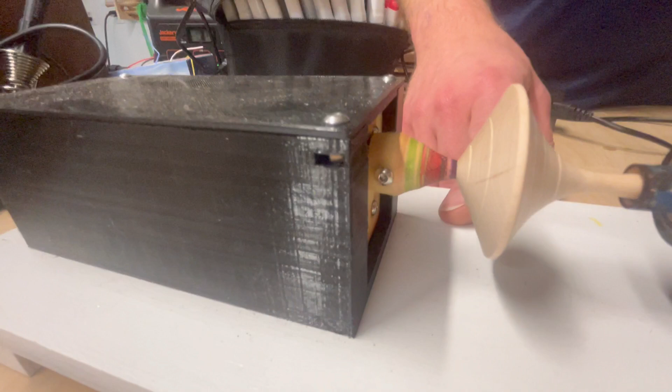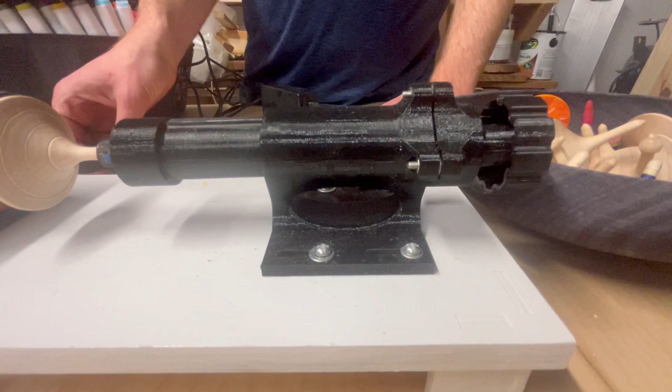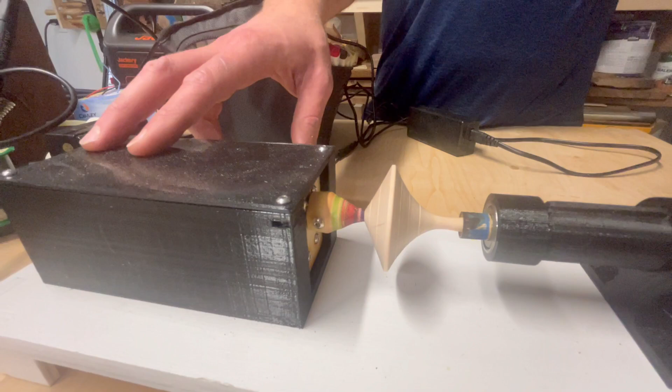So what's inside, we got a motor and what else in here? There's some electronics, a PWM motor controller, and a 1000 RPM DC motor. So that's the headstock and this is the tailstock, right? Yep. And you got a bunch of components, how many parts in all these things? There's 11 3D printed parts and 2 turned parts, then the board that controls the electronics, the motor, a couple pieces of power equipment, and of course the base here and some screws.

Okay, so go ahead, let's see it work.

I forget, is it speed adjustable? Yep, it is adjustable. Okay, cool. So that's how we're gonna have kids color the tops.

Like Bill said, we're not really crazy about the idea of turning the lathes on and having the kids color on the top. So when we do our demonstrations at the different shows we do, one's gonna be this weekend at the Environmental Center, we're gonna have the children color their own tops here. So what's the next step of the process, Bill?

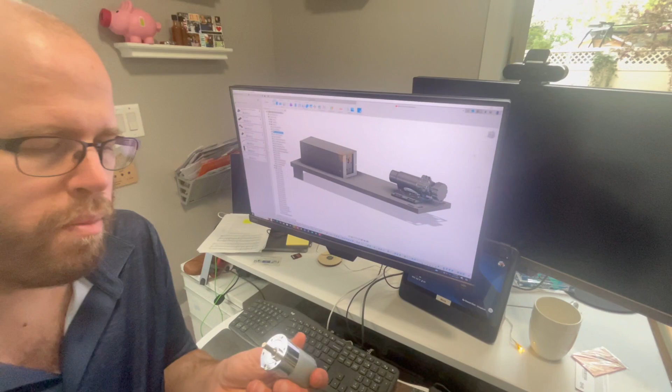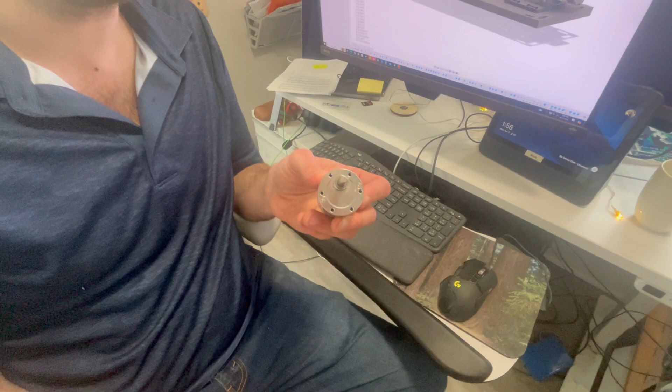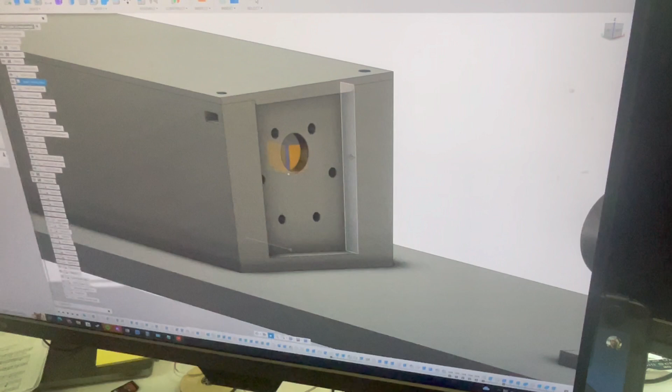Well, let's go take a look at the design. I designed this in Fusion 360, and I started with the motor. I designed the whole headstock end around the motor because I knew I couldn't build a motor, but I could buy one, so I bought a motor off of Amazon. I looked for 1000 RPM because I figured the torque on it would be pretty low and the experience of a high speed would be pretty good for the kids. So I started with this little faceplate that holds onto the motor at the headstock end, and then I just kept going from there. I knew I needed a plate to mount it, and I knew I needed everything to be coaxial so that the tailstock lines up nicely with the center of the motor spindle, and that was kind of the foundation of all of it.

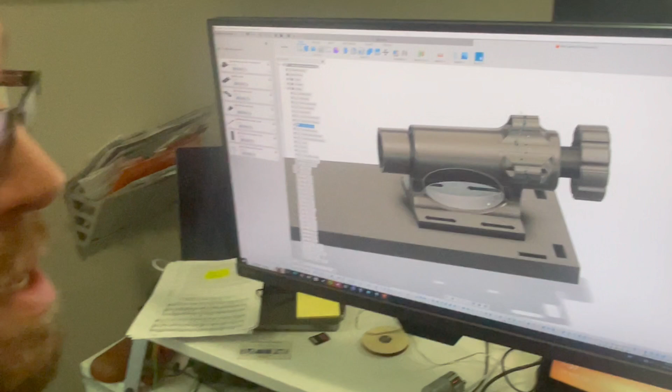Inside, you can see my mock of the motor, and then a place to mount all the electronics, a place to have the knob come out, and all the other bits of this thing. And then the tailstock, I used to have a Jet lathe, and having assembled and reassembled the tailstock before, I used that as the mental model for how to design it.

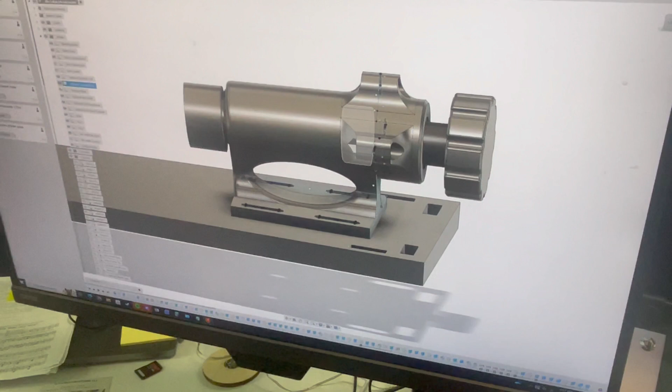This went through a couple of versions, it turns out to be a little complicated to make a tailstock, more complicated than I expected when I first started. But after about 3 or 4 versions of it, it turned out pretty good. The knob at the end, that's a pretty simple thing, but once you get inside, there's a couple more pieces to hold a 3/8 hex bolt.

Inside of a Jet lathe tailstock, there's a fairly large bolt that the quill comes in and out on. I couldn't find that anywhere, so I figured why not just use something I can get off the shelf. Inside, it's all designed around a 3/8 hex bolt.

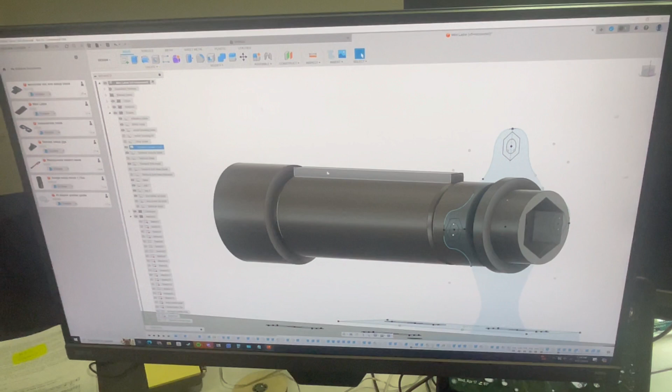The front end of it, the quill, is designed to retain itself. With the Jet tailstock, you have basically a screw that keeps it in place, but this top bar along the quill here keeps it from rotating inside. And at the front of it, it's designed to hold a bearing. It's not a perfect design, but it works pretty well for our purposes.

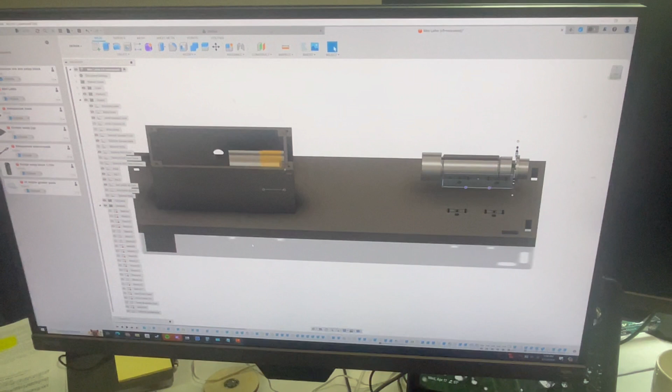And then of course the base I designed to be laser cut. It's just two pieces of laminated quarter-inch plywood. And that's about it. This took about a week and a half, start to finish. Total design time, about 60 hours. Something like that.

And you got the motor housing, right? Yep, so that's one, two, three pieces. Okay, so once the design's done, how do you get it onto the 3D printer?

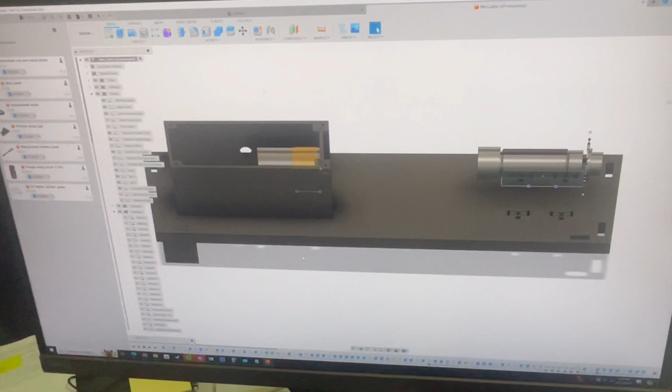So the 3D printing happens using a slicer. We export each of these models as STL files, and then I can import it into this program called Cura, and slice it, so I can put that onto the build plate.

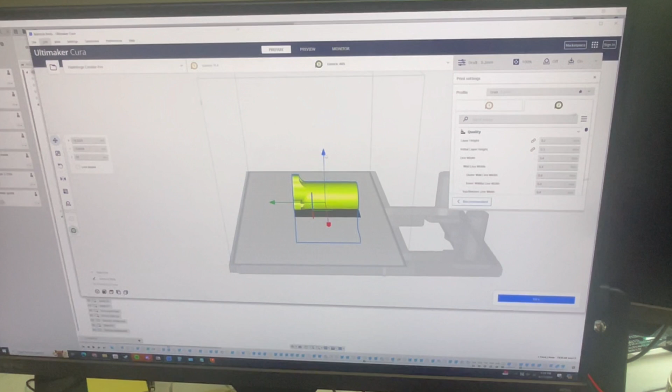I'm sorry, what do you mean by slice it? So 3D printers operate in layers, they lay down plastic in layers. Slicing it refers to cutting it up into these individual layers that are going to be printed. So one by one, the printer will lay down each of the 3D printed layers, and you can step through the process.

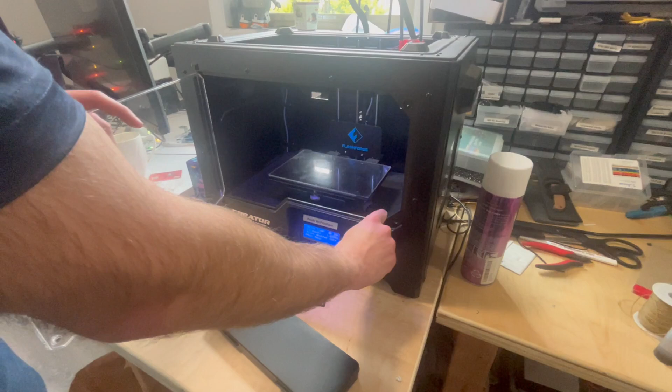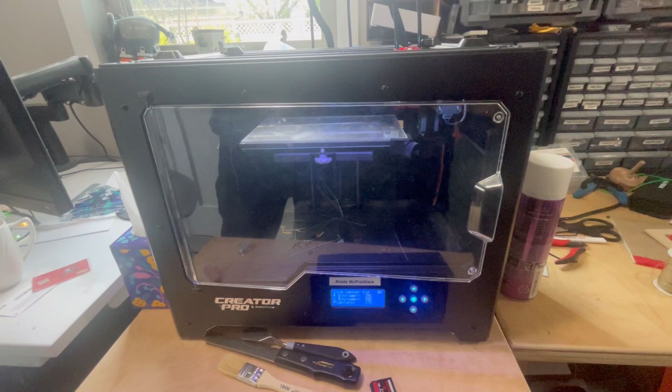Wow, okay. So once this is sliced in Cura, I can export it onto a chip here, and then I take that over to the 3D printer. I've already got it in there, and then we can print that. It'll warm up, and then it'll start printing. So this is a relatively small part. How long will it take to print that? About 20 minutes.

So you said this part's going to take how much time? About 20 minutes. All right, so again, we're not going to video all this, but you get an idea what's happening. So let's go on to the next step. Bill's going to explain the various parts of what he designed.

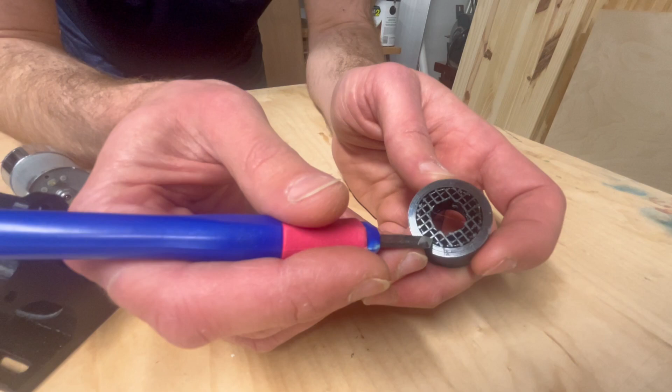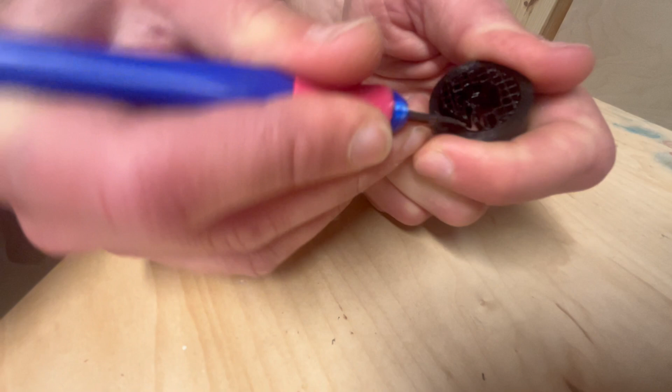So this is the part we're printing right now, right? Yep, that's what we just started printing, and you'll see there's this honeycomb shape here. This is support material. Because the thing is hollow on both sides, and it's got this part in between, it needs to be able to support it while it prints. So this material is breakaway material, you can pretty much just pop it out. There's a little bit of cleanup on these parts to make them fit well, and part of it is making sure the support material comes out nicely and doesn't leave little burrs and edges.

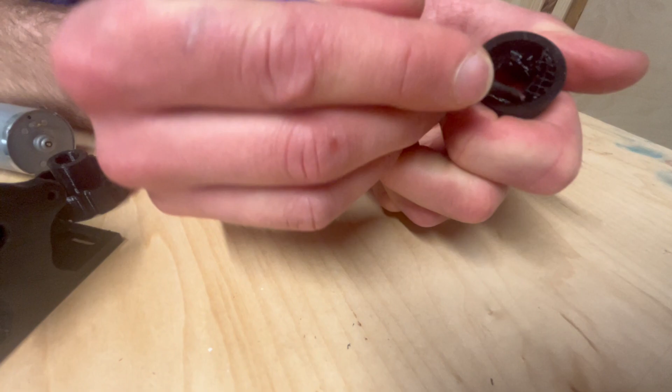So that's cleaned up, and the part it's going to fit with is the quill, which is right here. That's already put on there. I put that on there and glued it on, because glue takes some time to dry. Are you using CA glue?

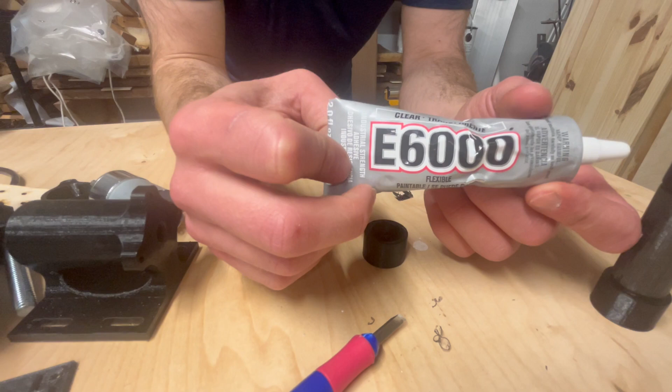Let's talk about glue. So the glue I'm using is called E6000. CA glue doesn't work that great with 3D printed parts, it tends to disconnect, and it also fumes. But this E6000 works pretty well. This is what most people recommend for 3D printed parts.

There's a couple of parts that have been glued together here, like this. You'll see in the end here, I've got a 3/8 hex nut, that's meant to engage with this part. So this is the bolt that I'm going to use for the tailstock, and that's meant to go in there. And here's the tailstock body itself. You'll notice one thing when I put this in here, I'm holding it against the end, and you'll see that it's not quite centered.

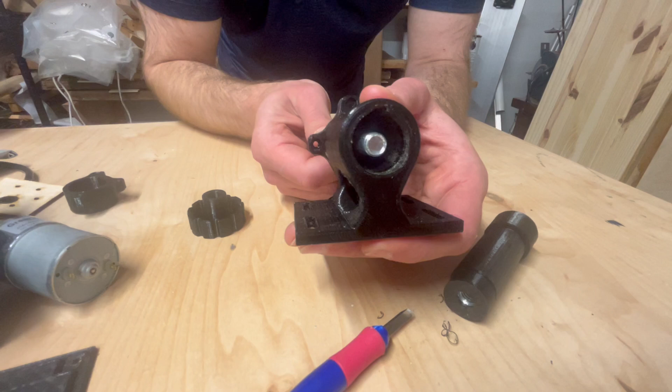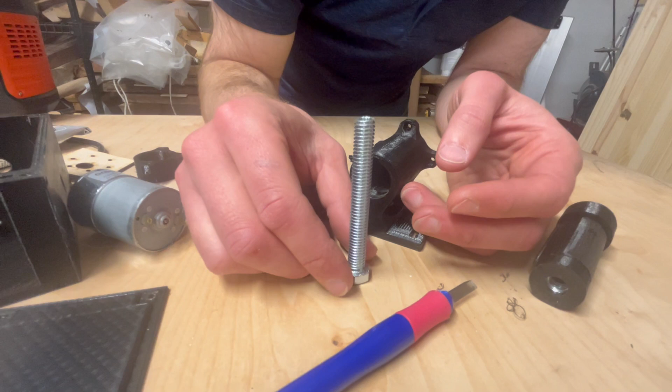So it turns out that a bolt that you buy from Home Depot, for instance, is not perfectly machined. If you stand it up, you'll notice it's just leaning ever so slightly in one direction or another. In addition, this surface is not perfectly perpendicular to the inside edge of this head. Is that pretty typical on all bolts? That's pretty typical. So if I stick this guy in here, you'll see, oh, well, this one's actually pretty good, but a lot of the bolts you buy are going to be imperfectly machined, which is fine.

One of the things you can do, if you find that it's leaning to one side, is take a Dremel and shave down parts to make it fit well within the 3D printed parts so that it goes straight. That's what I did here—this bolt was really crooked to start with.

It's not perfect now, but what you're trying to avoid is super crooked. You can deal with a little bit of out of tolerance here, but the more it is, the harder it will be to advance the tailstock.

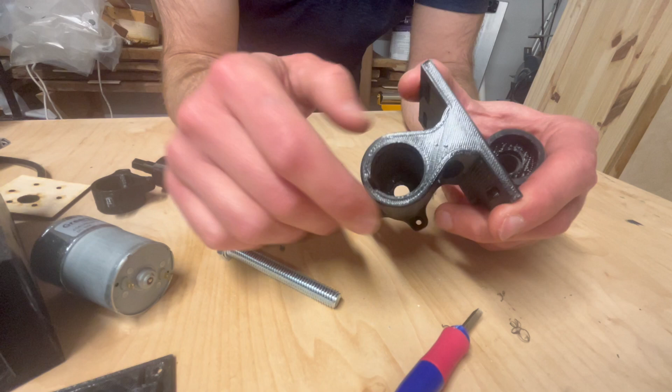These parts, once they come off the 3D printer, you want them fairly tight, but they'll be too tight when you first pull them off. You'll notice this part is smooth—I took a file to that, and also to the inside channel and the inside in general to make it smoother. 3D printed parts have lines along the edges, so you want to file those down on the parts that are mating.

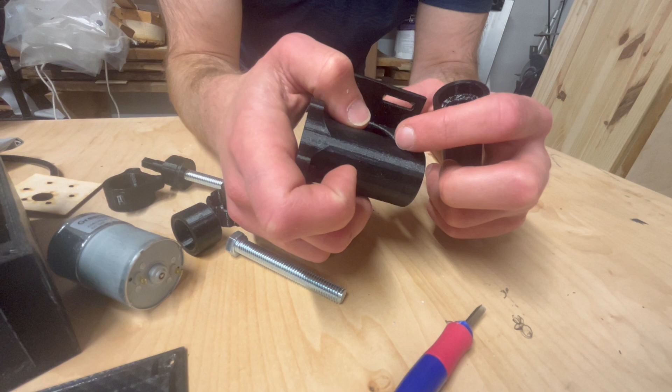We can also use a little bit of lubricant. I actually use some food safe lubricant—doesn't have to be food safe, but it's just a petroleum-based lubricant of some sort to make these things slide nicely together.

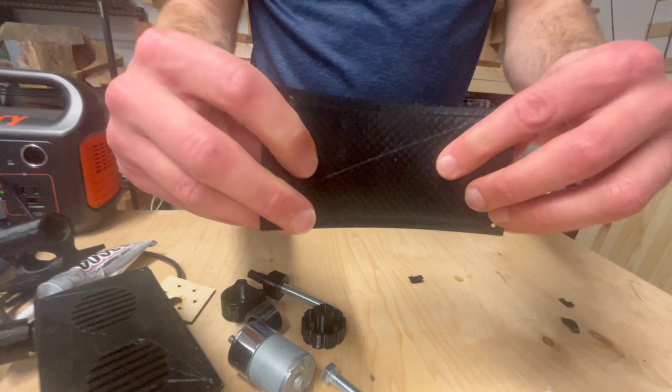Okay, let's talk about the lid. The lid that I first designed was this one—it's rigid. It was the soundboard, and the motor would make a really loud noise that Bob complained about. So I redesigned it so that it's a rubber piece, and this damps the sound pretty nicely.

So that's all about the parts here. Let's quickly go through the electronics piece. Let's talk about electronics.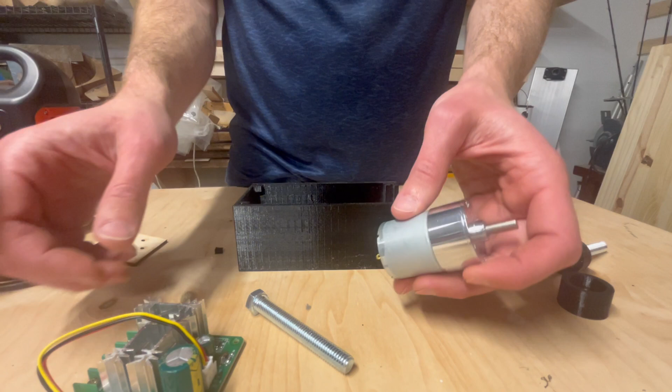So this is a DC motor. It has a gearbox—it's a 1,000 RPM gearbox. This right here is an off-the-shelf part called a PWM motor controller. I got this from Amazon.

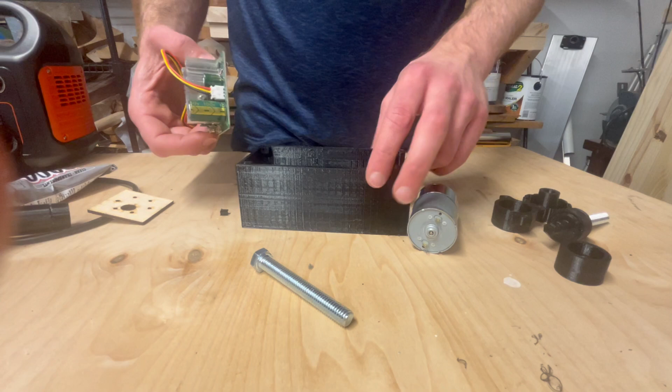They used to sell a different model of this, and then they started sending this one instead. The motor housing is designed for the different model, so it doesn't fit perfectly, but it fits good enough for our purposes. When you buy this, you're buying the motor controller and the motor at the same time—those two parts together cost about 25 bucks.

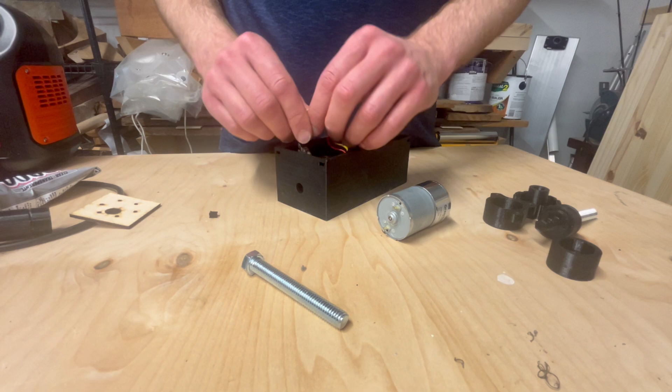So this is the speed knob, and this just goes through here and connects like that. I like to solder some wire onto this motor and then connect it, tighten these down. You basically plug them in and tighten it down.

All right, so we'll go ahead and connect these up and do a little bit of soldering to connect that motor. What's this one? So this is actually a jack.

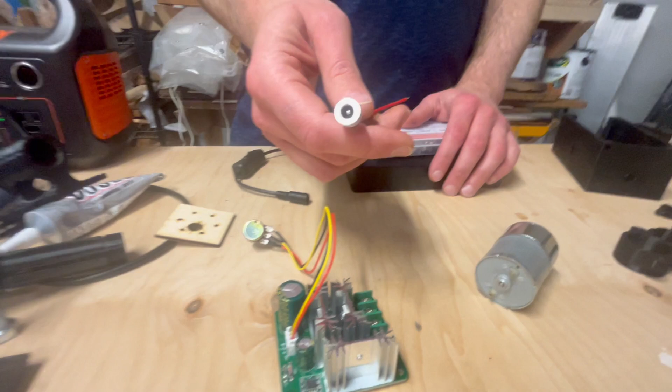A jack—I didn't want to have wires sticking out of the back because you never know what kids are going to do. So it's basically a quick release for the power jack on the back.

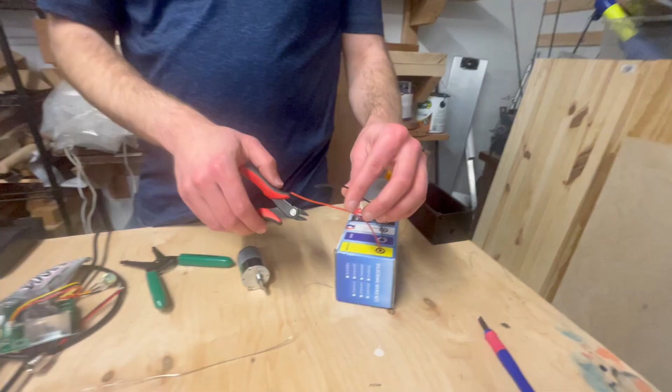Okay, so we're going to go ahead and assemble this. The first thing we'll do is solder that motor together. We'll get the soldering iron here, pick some wires, and strip them.

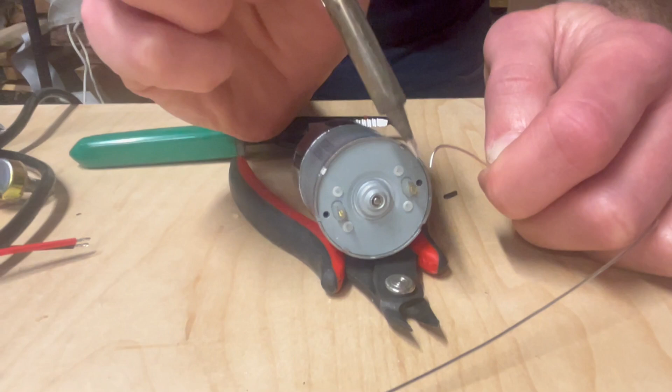And we're going to solder them on. The first thing we want to do is tin the connectors—otherwise nothing will stick. So what we're doing here is getting some solder onto the connectors. We want the wire to stick when we try to attach it, so we need to get it wet with some solder. We might need some flux, that's what I think I'm going to do there. So we're basically tinning the connectors so the wire will stick to them.

Alright, get a little bit of solder on there to start with, and we'll stick those wires in. You've got to pay attention to what says plus and what says minus—that's plus and that's minus. We'll put the red on the plus.

As you might remember from car batteries, wherever you learned it. So that connects that, and we'll do the minus—same deal.

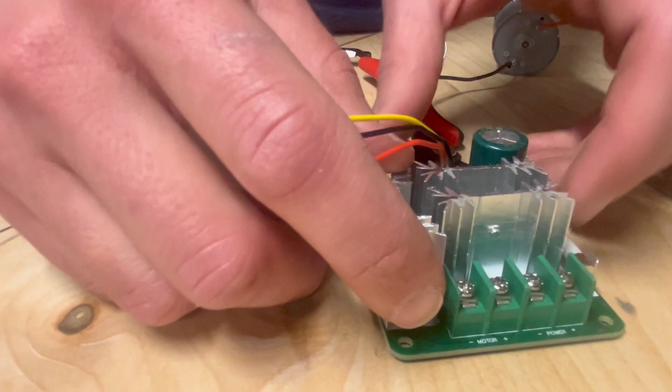All right, so there's our motor. That's all there is to it? All ready to go. Just gonna twist these wires a little bit so they don't come off. There we go. All right, so that's ready to connect up to this board. The board tells you where to plug everything in. It says motor minus, motor plus, and then power minus, power plus, and that's all there is to it.

Okay, so all we need is a screwdriver, which I've got right here. Cool little set, little micro set, screwdriver bits, very cool. You can get those at Micro Center or anywhere pretty much. I think they have them at Home Depot too.

So we loosen up all these connectors, like so, and then we can connect the motor. So the motor plus is there, motor minus is there. Connect up. Oh, I forgot to strip it. Plug in the motor minus here, and then tighten it down. Motor plus.

All right, now we are going to stick this here, and we'll want to connect this through here. Don't forget, let's talk about the jack. So this jack right here is to allow us to have that sticking out the back and then plug our power connector into it, just like this.

That's so that if the kids go a little nuts and knock it off the table, it's not going to do any damage. It's just going to break away. But do not forget to put this through here before you connect it to the board, otherwise you're going to be mad. Okay, so don't forget to attach the nut before you connect it also.

So basically, not a whole lot of connections, a little bit of soldering, and then the screw terminals. It's pretty straightforward, not a whole lot to it. Now if you wanted to make the controller yourself, well, more power to you, but that's not something I want to mess around with. It's really not worth the effort since these motor controllers are pretty inexpensive. You have to be comfortable with fiddling around in small spots in order to do this, but as long as you can do that, it's not too tough.

There we go. All right, so this is just a DC power adapter, 12 volts. To run with the same voltage, these are pretty inexpensive, like 20 bucks. Actually, this one was probably about $6. Wow, yeah, so they're pretty cheap. It's amazing. So it's not a very high build price here. It's a pretty cheap build.

So we're testing this out, make sure that works. Make sure the speed controller is working. Yep, so our motor's running. Everything seems good. That's very quiet. Yeah, it gets louder once you have all the parts attached to the board, because it's got this soundboard effect. It also gets louder once you put a little bit of back pressure on it, some load. Put it under load. Yeah, once it's under load, it gets a little bit louder. All right, so everything works there.

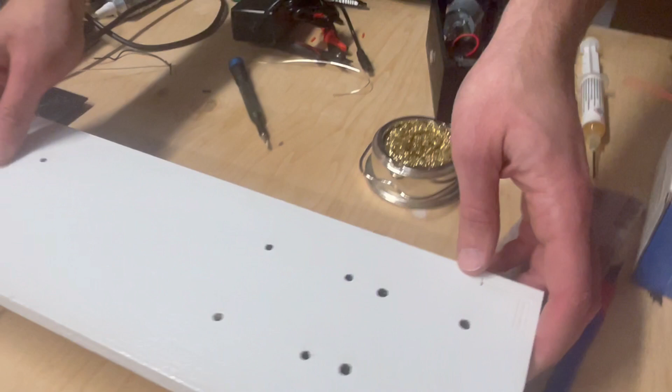Now we're going to glue down the board. And actually, one of the things that I'm going to do is make sure that the motor is going to turn the right direction. I don't remember what direction it needs to turn, but we're going to have the kids standing on this side, and we're going to have the motor here, and we want it to be turning this way. Turn counterclockwise. Yeah, well actually, we want it to be turning clockwise. That makes it easier for them to put the marker on the top and have the top going away from them, so that it's not destroying the marker in the process.

Can you adjust the rotation direction? You can't change the direction. I could do some extra wiring and change and have basically a double pole, double throw switch. I could have a switch on here that would let us change the direction, but I haven't bothered. It hasn't seemed to be an issue. It's really not a necessary step.

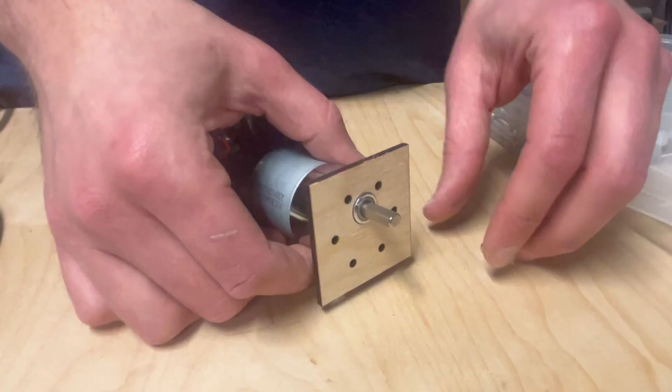All right, this right here is the motor mounting plate, and this holds the motor in place so that it's well aligned with the tailstock. And then it sticks right in here. It's got a channel for it, and it holds it nice and rigid. We have to screw the motor onto it, so it's got 6 screw holes here, and we're just using M3 screws.

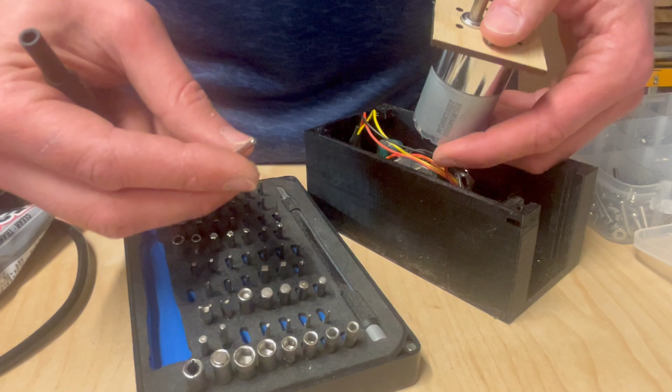I'm not using American screws because American screws stink, and they're not very good for precision work like this. Metric screws are great for this, especially because when you're designing holes, you don't need to remember much. You just remember that the hole needs to be 3 millimeters, M3. Let's see, gotta find the right bit here. All right, so we just screw all these little screws in, and then our motor is nicely held and attached to the front of the housing here.

That's in there nice and tight. The electronics are in there good. So I think we're ready to call this part done and close it up. And you said that flexible top is sound deadening? Yeah, it keeps the sound inside. Okay, does a pretty good job.

All right, so to connect this in here, first thing we got to do is drill out these holes a little bit, because if you look closely, the holes for putting the screws in are filled with a little bit of junk. Sometimes the 3D printer at such small sizes doesn't do a perfect job of getting things precise.

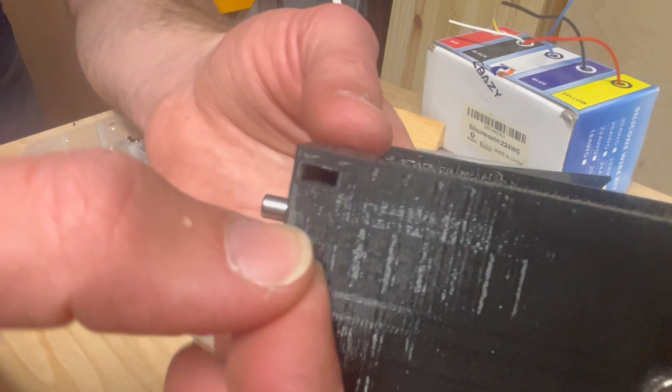Okay, so to hold the lid on, I use a captive nut. So this nut goes in here. Oh, yeah, okay. And then the screw's going to go down into it. That's a clever design feature. It makes it easier than having to go all the way through the thing.

All right, not that lid, this lid. It's got a little channel here to hold this in place even better. So that just goes on with a couple of screws. Again, M3 screws. Let's see, where's my screwdriver?

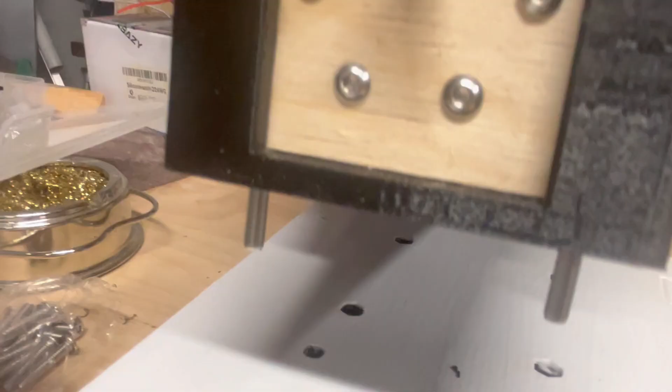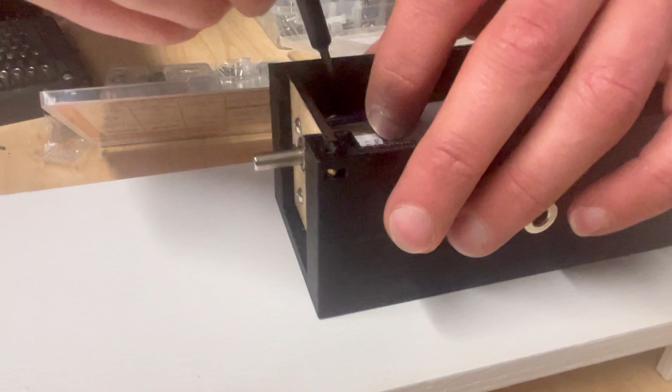Okay, so now we have to mount it onto the mounting board. We popped a couple screws in the bottom, and we're going to bolt that in. We're going to put a couple nuts in the bottom. Yep, that'll hold it in place, and then we're almost done for this part of the process, other than hooking up the power cord. Yep.

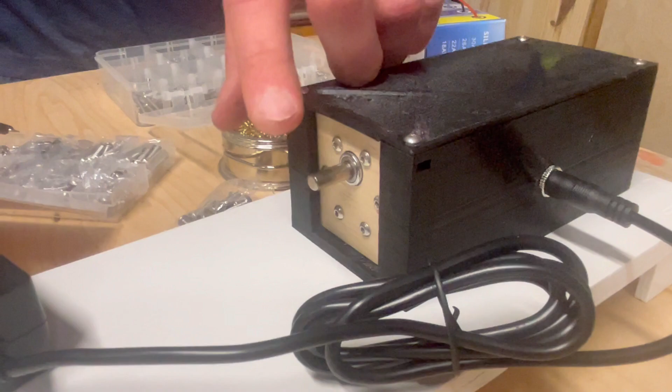Okay, so we're bolted down. Motor's working, very quiet. Oh well. Some of these parts need lube so that they move smoothly against each other.

Oh, we're getting into the tailstock now, right? Yep, we're building the tailstock.

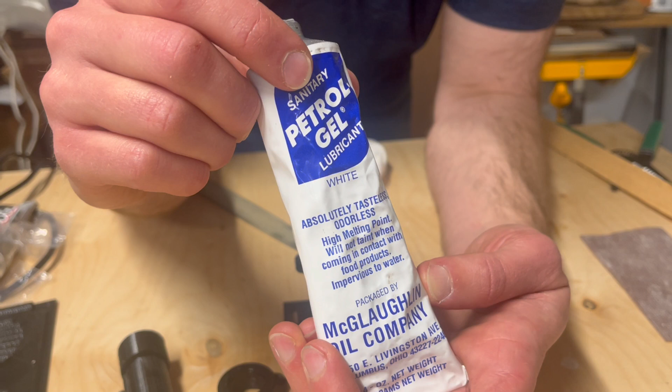All right, so I use this sanitary lube. It's for machinery that has food contact. I do this because I figure this is probably the safest lube to use. You could use something like a regular machine oil or something like that. I don't know, I just wanted to be a little bit extra safe.

But pretty much anything that's good for machinery to move well against each other will probably work good for this purpose. Okay, so the parts that I've lubed up are mostly the ones that are in contact with each other in the tailstock. So this is the tailstock quill itself. I added a little bit of lube here for these parts that'll be in contact with the inside of the tailstock, and then I wiped most of it off. You don't really need much, just to help the 3D printed parts slide against each other a little bit better. And as you can see, this is moving pretty well.

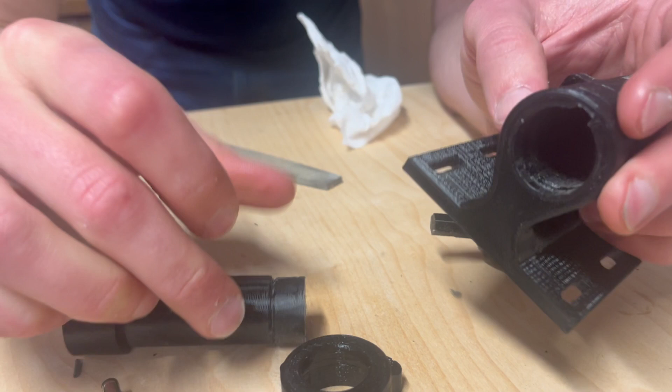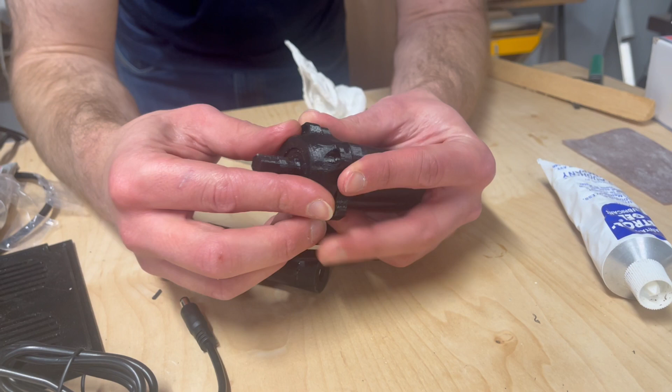And then, of course, this part right back here is going to retain this bolt. So this bolt right here goes in here, and then this is a retainer for it, and these parts will need to slide against each other as well. The more this gets used, the looser and slidier it will get, so don't worry too much about being perfect with this. As it gets used over time, it will become easier to use.

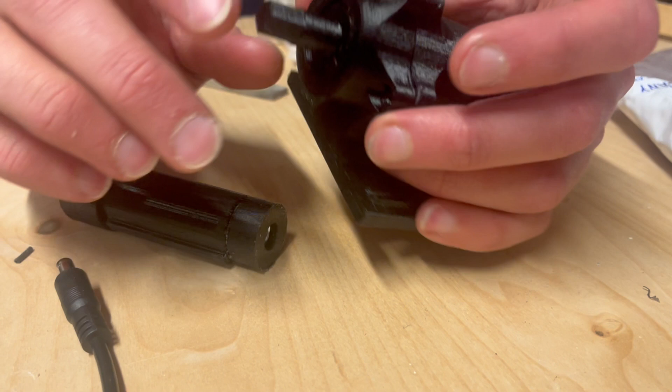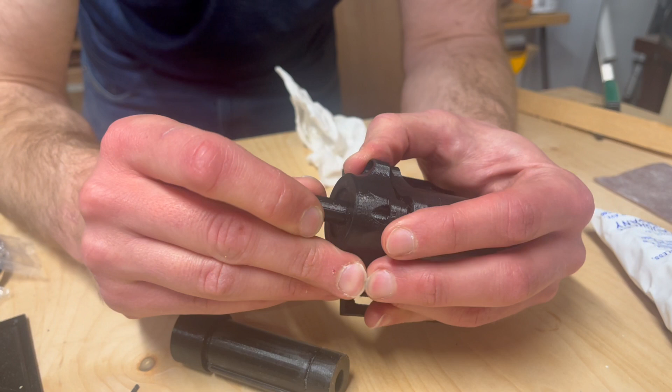So let's go ahead and put it together. To retain this tailstock bolt, I have this retainer here, which is what I'm calling it. I don't know what an industrial machinist would call it, but I'm calling it a retainer, a bolt retainer. So that goes on like that to hold that to the tailstock body, and then I'm going to use M3 screws to hold that on. So I'll go ahead and get those.

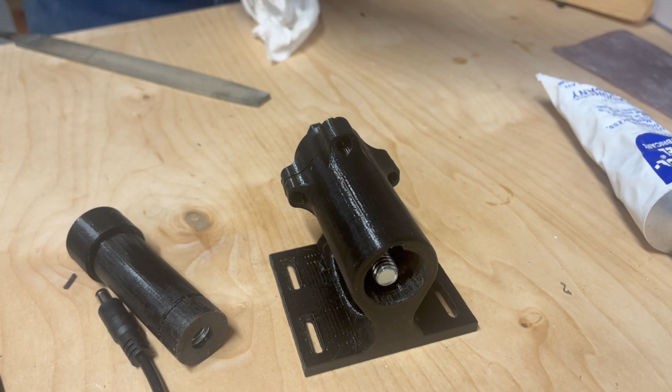All right, make sure that that's long enough. It is. We're going to use some washers as a spacer. We don't want the tailstock bolt to get pinched. So, all right, now that we have this bolted down and tightened, you can see that the bolt spins. Yep, and now we can put the quill in. Get that in there. We also want our knob. Here's our tailstock knob.

And then we can advance that, pull that in. Once we have that, all we have to do is bolt it down like we did with the motor controller onto these 4 holes. All right, now we're ready to bolt this down.

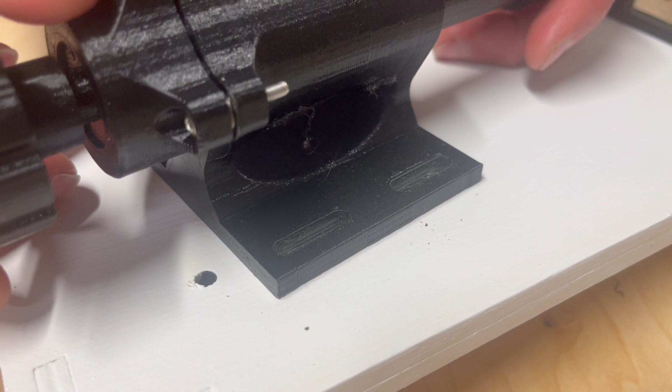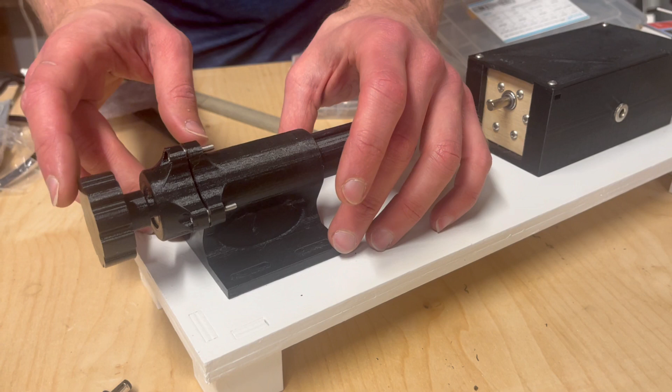I've got these channels here so that we can make sure the alignment is good. You want to make sure the center of this thing is aligned well with the center of this thing. We'll do a little bit more alignment later, but we'll do some initial alignment now. In this application, it's really not that critical since we're just coloring, not turning a pen on it, which would be very critical.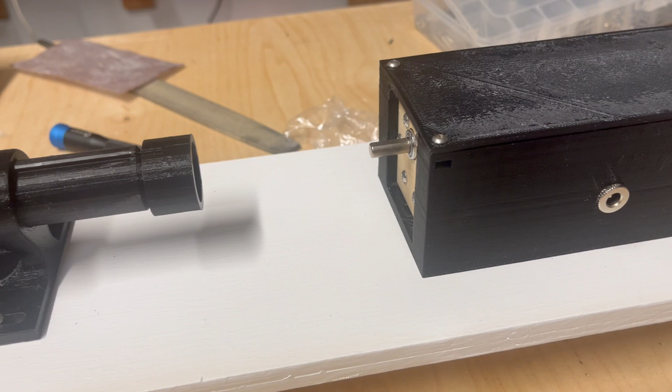Okay, for the live center, we need a bearing that will spin and hold the tip. There are good bearings and bad bearings to buy for this. This is one of the bad bearings to buy for it. You can see it's got this plastic shield here, and it's got a lot of play in it. It kind of wiggles around. So you want to get one of these better bearings.

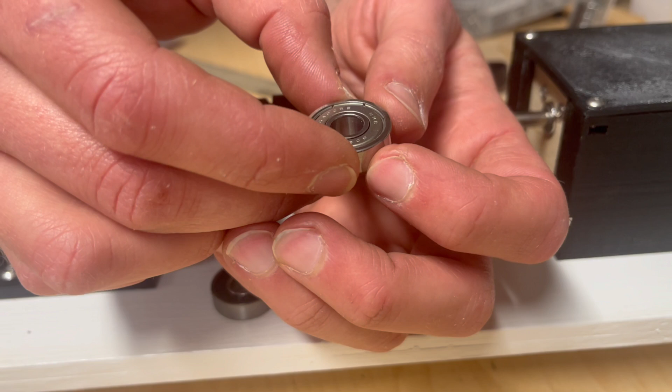This is a 608Z bearing from Singapore. You can buy these on Amazon, but you can also buy them from McKesson or McMaster Carr. This one is tight, you can't really wiggle it around in the races. You want one like this because the tighter it is and the better it runs, the more stable the top will be as you're spinning it, and the kids will have a better experience.

Oh, so that's just a press fit? Yep, just presses right in.

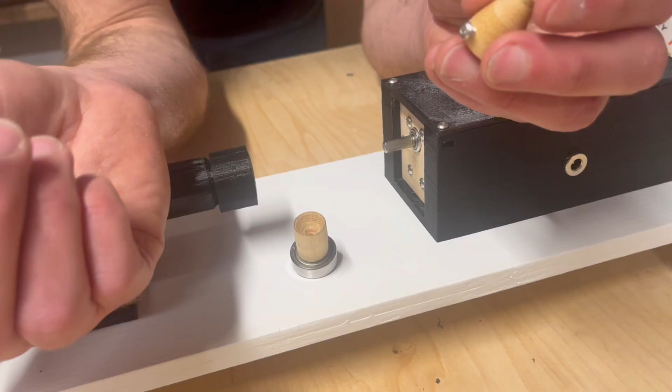So this is the most essential part. I had been 3D printing these chuck pieces to start with, and I found that the tolerances were really bad. The tops tended to wiggle around a lot. So I ended up turning them out of a really hard wood. I used buckthorn. You can use whatever you want, as long as it's hard. You wouldn't want to use something soft like walnut or pine.

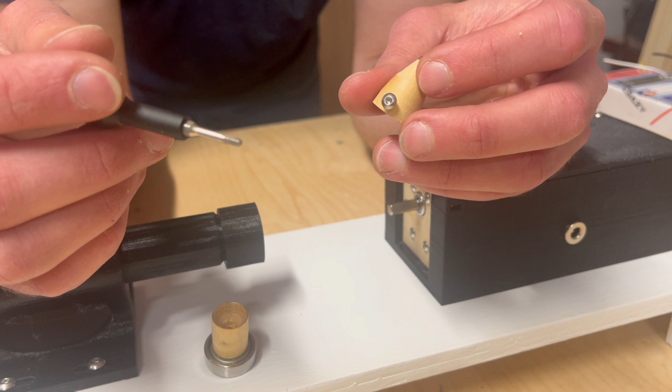What did you use? Buckthorn. Buckthorn? Buckthorn, yeah. I don't know what that is. It's invasive.

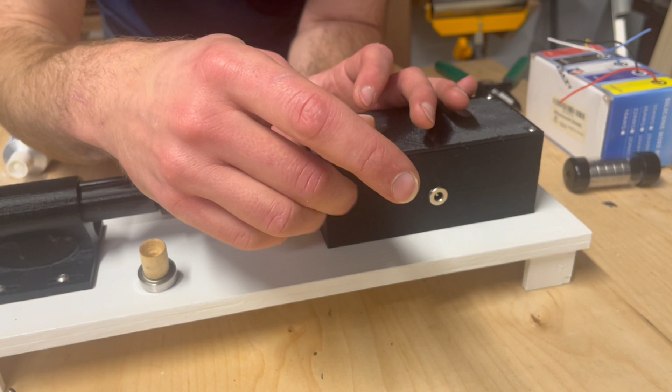Okay, so this part right here goes onto the spindle end, and it has a screw here that I've tapped a hole for to hold it onto the flat side of this spindle. I just tighten that down to hold it in, and then this part right here goes into this end. I've got this bearing here, but you can see that it just goes through. This is an 8mm hole through the bearing.

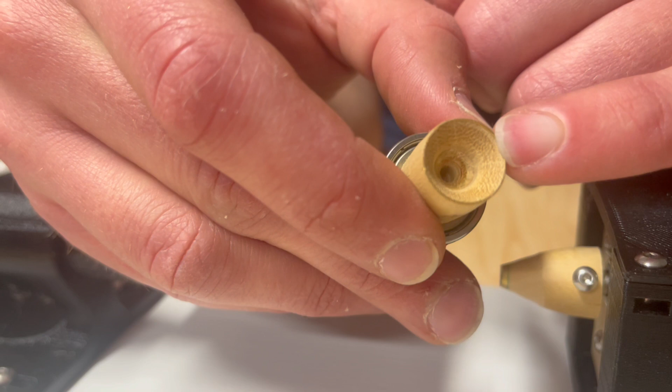So you can just mount a piece, turn it, and you want a cup shape like this that's pretty deep. This is going to hold the handle end of the top, and it's a cone shape so it can accept all sorts of different shapes of tip. And then at the end of this one right here, you can see there's a very small cup that'll hold the tip of the top.

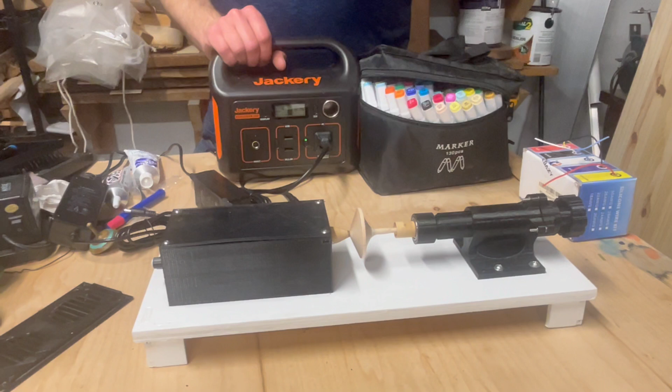Okay, so here's the final product. We have a top all chucked up here. We're going to power this with a little Jackery power supply, and then we need some markers that we get at Amazon. I think we've got all these markers, I forgot how many in there. I've got one of these also. Like 25 or 30 bucks, you can get that many colors.

And now we're going to do some coloring. Yep, we'll turn it on. Turn it on, hold on. Turn it on. Oh yeah, there we go. So we got the speed controller over here.

And Bob's going to do some turning. Yeah, he's going to do some coloring. Time for Bob to have fun.

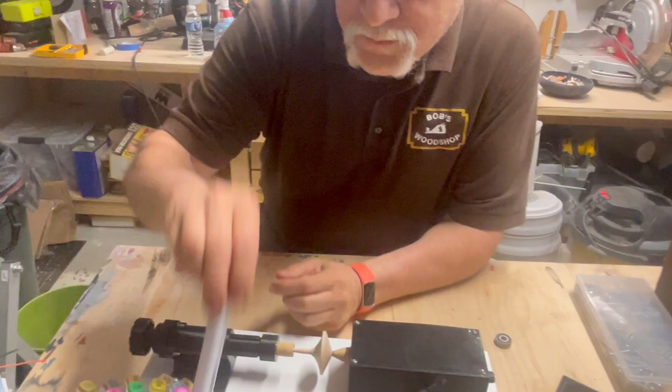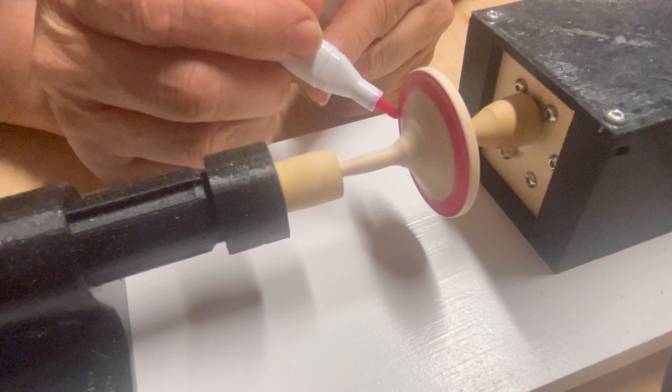Ready? So this is my favorite part. I like using hot colors, so I'll use red, orange, and yellow.

In this application, we don't really need a banjo. And it's going to be that simple.

So what we found when we're doing this out at the different shows, kids really like to do this. They get a big happy smile on their face. But even more important are their parents who are taking videos of this, and they really seem to get a kick out of it.

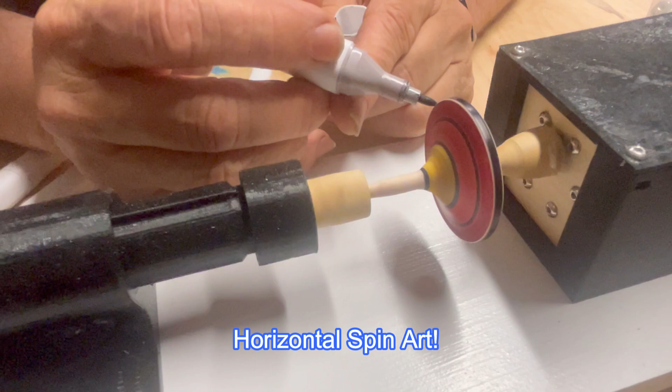All right, Bill, I think this is working out really good. We're going to wait a day or so, and we're going to be using this at the Environmental Center on Saturday. So thanks for inviting me down to your shop, Bill. I think this is a winner. I think it's a great little project, and thanks for doing it. Yep.

Defying gravity. Yeah, that's what the New Jersey woodturners are all about, making these tops for charity.